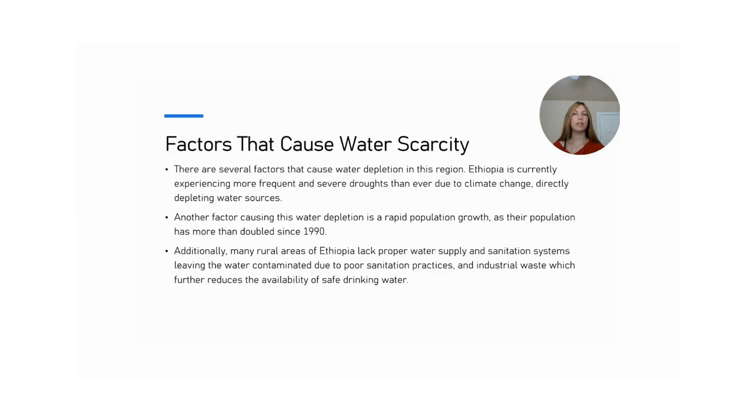There are several factors that cause water depletion in this region. Ethiopia is currently experiencing more frequent and severe droughts than ever due to climate change directly depleting water sources. Another factor causing this water depletion is a rapid population growth, as their population has more than doubled since 1990. Additionally, many rural areas of Ethiopia lack proper water supply and sanitation systems, leaving the water contaminated due to poor sanitation practices and industrial waste, which further reduces the availability of safe drinking water.

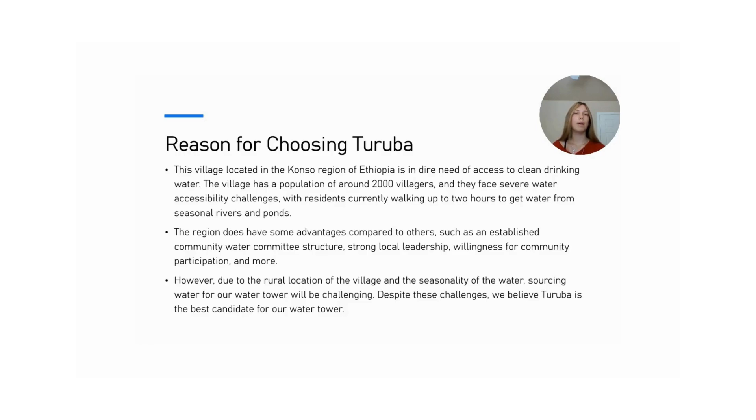The reason that we chose Turuba is that they are in dire need of access to clean drinking water. The village has a population of around 2,000 villagers, as I previously mentioned, and they face severe water accessibility challenges, with residents walking up to 2 hours to get water from seasonal rivers and ponds. The region does have some advantages compared to others, such as an established community water committee structure, strong local leadership, willingness for community participation, and more. However, due to the rural location of the village and seasonality of the water, sourcing water for our water tower will be challenging. But despite these challenges, we believe Turuba is the best candidate for our water tower.

The successful design and implementation of our water tower relies on a strategic partnership with established nonprofit organizations that have proven track records in Ethiopian water infrastructure. The three nonprofit organizations that we chose to partner with for this project are Drop of Water, Water for Ethiopia, and People in Need. Together, these three organizations provide a partnership that combines technical expertise, community engagement, and local knowledge, all of which is essential to our project's success in providing sustainable, clean water access to the Turuba community.

From an engineering perspective, the implementation of a truss water tower system in Turuba presents an infrastructure solution that addresses multiple socioeconomic challenges. Statistical analysis shows that women and children spend approximately 57 minutes per day on water collection tasks, resulting in an estimated annual loss of 347 productive hours per household. The structural design of the water tower would establish a centralized water distribution system capable of serving the community's baseline requirements. According to recent epidemiological studies, such infrastructure improvements typically reduce waterborne disease incidence by 45 to 60% in rural Ethiopian communities.

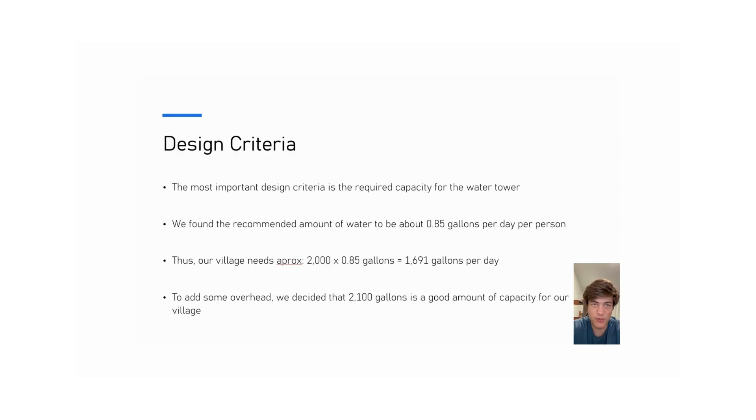I read online with the Mayo Clinic that the recommended amount of water average between men and women is around 0.85 gallons per day per person. Thus, our village of approximately 2,000 villagers needs around 1,700 gallons a day. And to add on a little overhead for population growth and whatnot, we are aiming to create a water tank that has around 2,100 gallons of water in capacity for our village.

Our water tank design is going to be a cuboid design. This is mostly because it's easier to model, and also it makes it a lot easier for the construction process of our villagers, because we will most likely be using local population's labor. We're not sure how well educated they are in terms of construction, and we wanted to keep the design as simple as possible.

And so we decided to go with a cube that is 5.44 feet by 5.44 feet, and then it's going to be 9.5 feet in height, which is going to give us a volume of around 2,061 gallons of water, which meets our design requirements. It will also have a wall thickness of half an inch, also meeting our design requirements outlined.

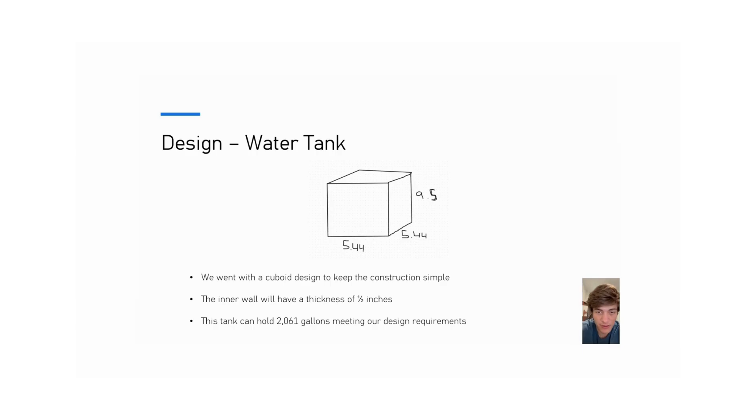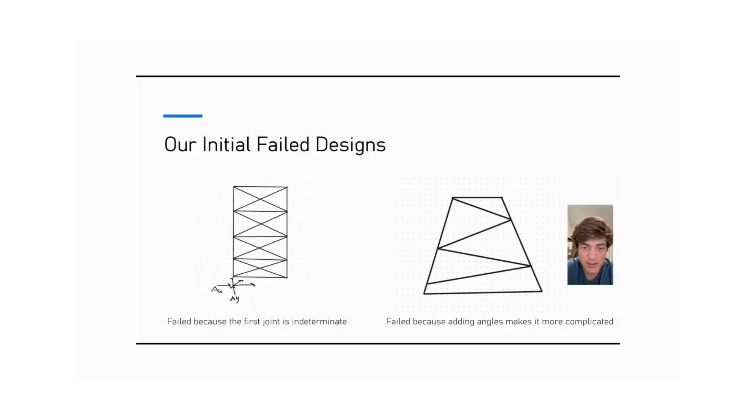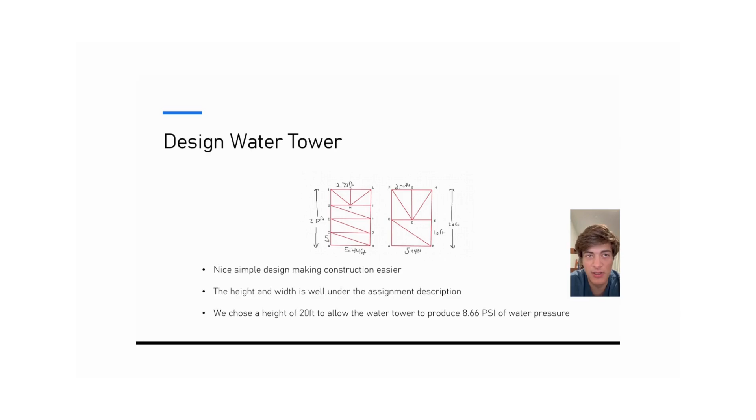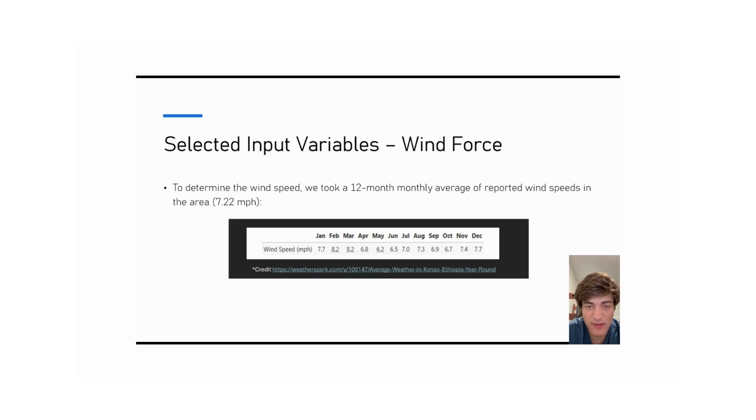Next, we're going to talk about input variables, which are going to be the wind force and also the weight of the tank and the water combined, which is what is being withstood by our truss designs. For the wind force, we took a 12-month monthly average of the local wind speed, and we determined that it's around 7.22 miles per hour on average.

We chose the coefficient of drag to be around 1.3 because NASA said that the drag coefficient for flat surfaces is around 1.3, and we only use flat surfaces on our design. And we're going to model the wind hitting it head on because that's when the drag coefficient would be heaviest.

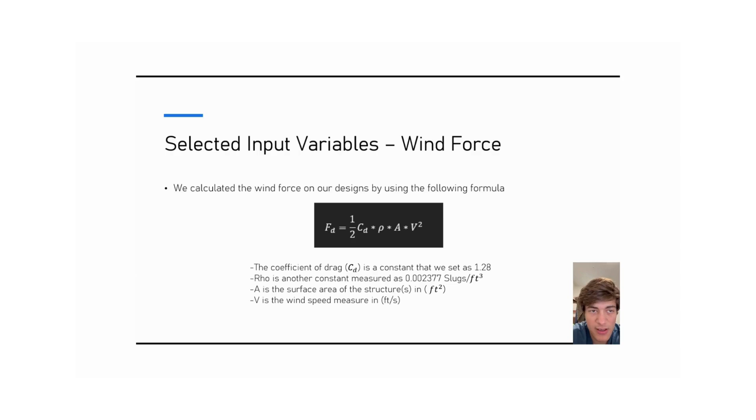And then the surface area of the structures is just simply taking our truss design and then determining what the face of that would look like, and then adding all those together, as well as adding together the face of the tank. Here's kind of the Excel example for this calculation. It breaks everything down, and I have this, of course, for both design A and design B because design B needs to have a different amount of truss faces for it to work.

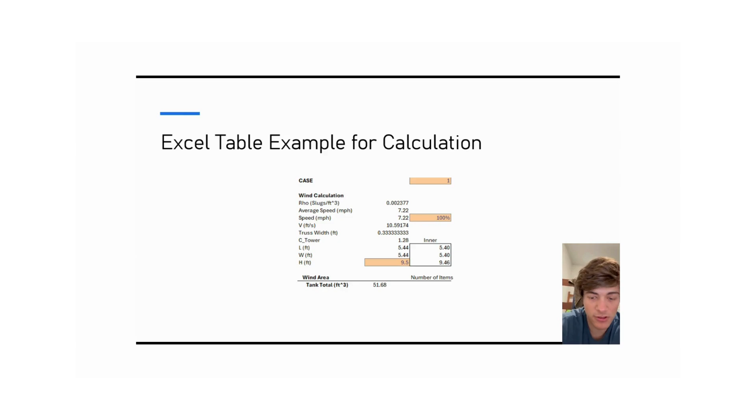We determined the weight of the tank and the tower using the following Excel sheet. So we determined the weight of the capacity of the tank in gallons, and then we converted from gallons to pounds. And then we determined the weight of the tank by taking the volume of the outside of the cube and then subtracting the volume inside of the cube. That way we get the volume of the actual amount of material inside the cube.

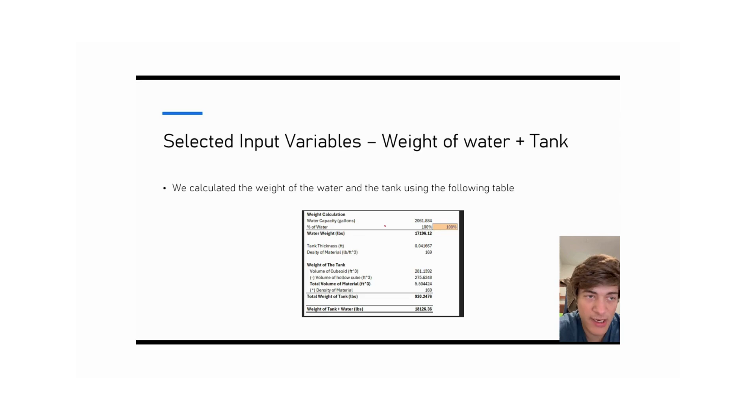And then we multiplied that by the density of the material, which for our design, we decided to go with 1060 aluminum alloy, which I'll talk about later. But yeah, that's kind of what we did. And then we added those two numbers together, and that was going to be our vertical component of our diagrams.

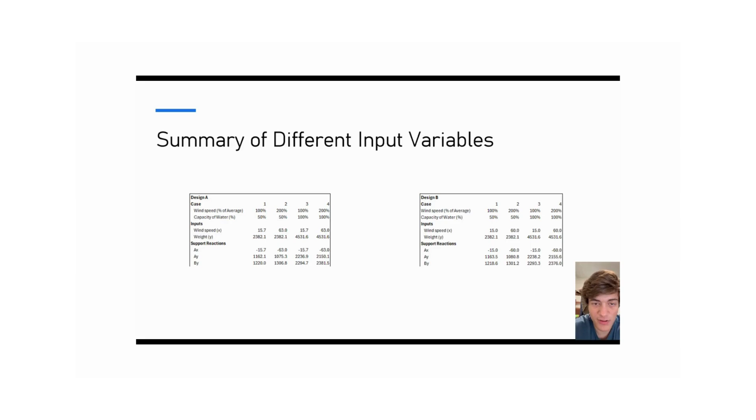Here's just a summary of those variables across the different cases, which was important, obviously, because we were given different amounts of wind speed and capacity for our tanks to showcase the best case scenarios, the worst case scenarios, or just average scenarios for our designs, which is very important as it showcases all the different outcomes for your designs.

And here's the results of our simulations. The numbers are going to be in pounds. And again, I divided them out by case. So you can see the negative numbers are going to be compressive forces, and the positive numbers are going to be tensile forces.

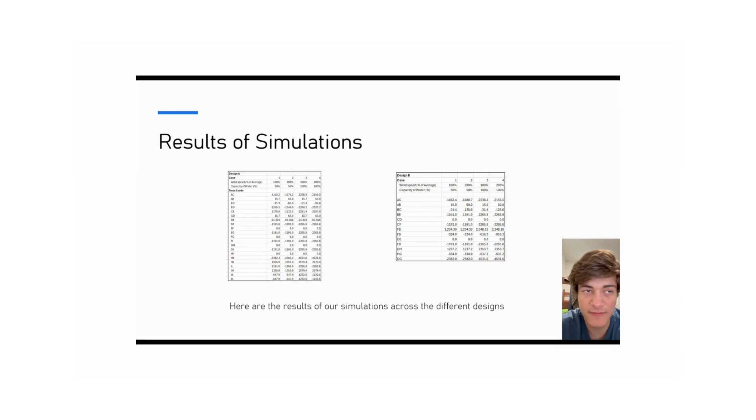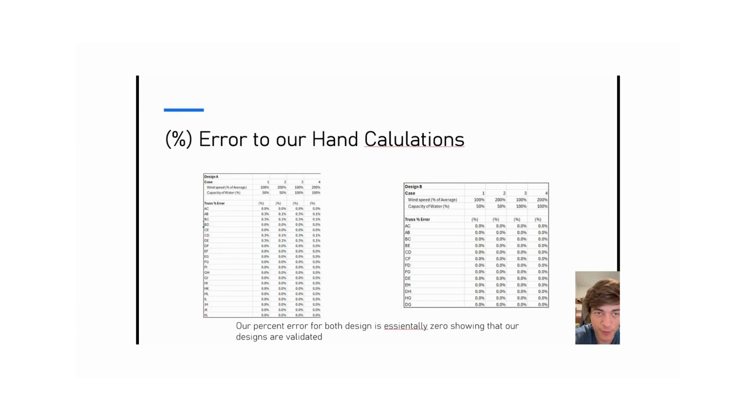Here's the percent error of our hand calculations and our simulated values. As you can see, our percent error is very low. It's around 0% for both of our designs, showcasing that our hand calculations are validated by our simulations.

I decided to only showcase case 4 for the deflection, just because it's our worst case scenario with double the average wind speed and 100% of water capacity. And quite frankly, a lot of the deflection diagrams look similar, so in order to save on time, I'd only showcase case 4, which is the worst one.

But you can see based off the coloring that design A has a lot more red in it, meaning that there's a lot more deflection movements around that joint, whereas design B only has red in that corner, showing that it's handling the load a little bit better in terms of deflection.

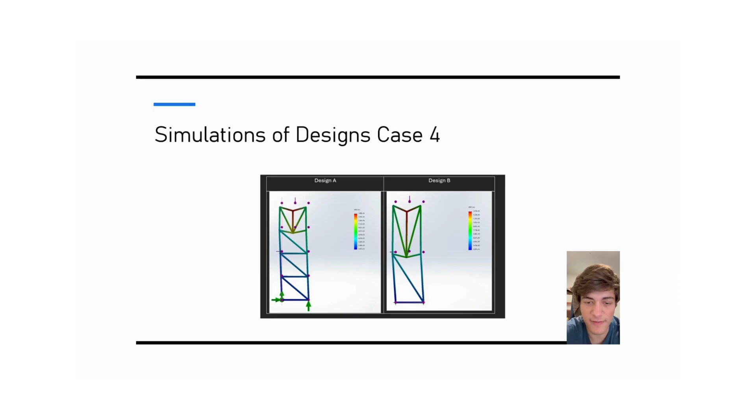Here's our key findings for our simulations. We determined that both design A and design B performed very similar, meaning that design A doesn't really have an advantage over design B like we initially thought it would. Therefore, design B has a lot less truss members, so it would be a lot lower in cost because there's a lot less material there, obviously, which led us to the decision to choose design B for our project.

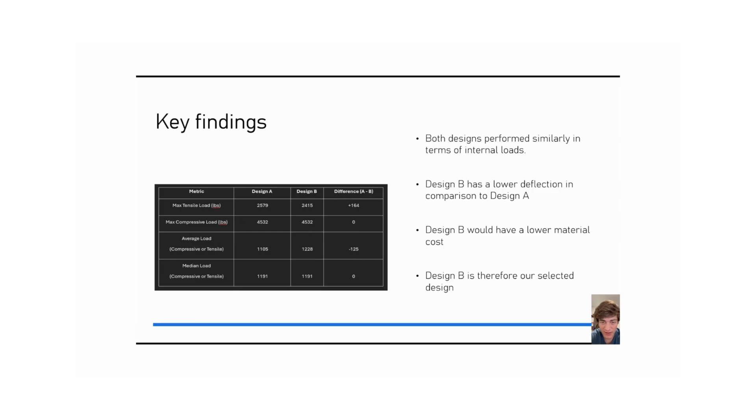We decided to go with ASTM A572 steel because it's the industry standard in construction and trusses, and it was easily sourced in Ethiopia. And then we also decided to go with 1060 aluminum alloy for our tank, as it is able to withstand the inside pressures of our water, and it's also a little cheaper, and it's also lighter than other metal would be, allowing us to have a little more leeway in our tensile strengths.